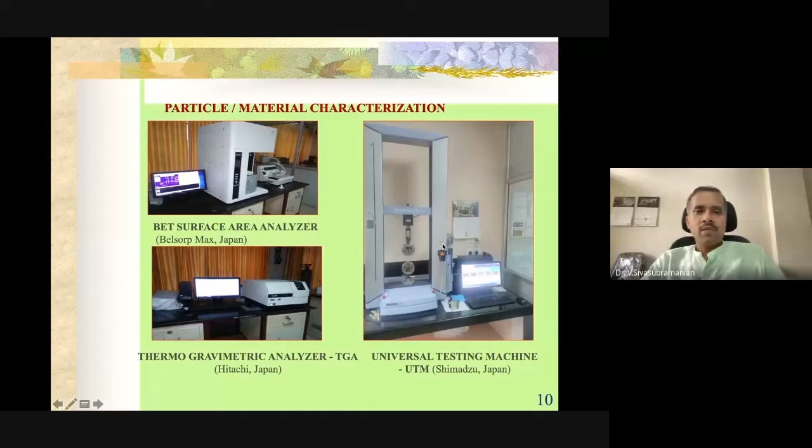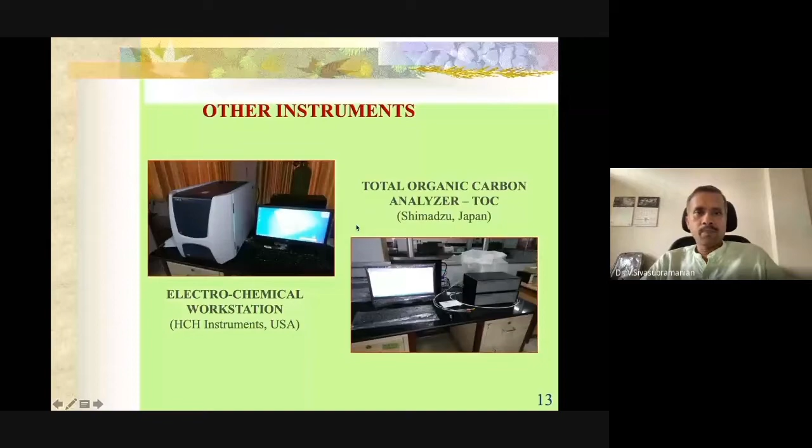We have a BET surface area analyzer, TGA thermogravimetric analyzer, and universal testing machine, FTIR spectrophotometer, and UV visible spectrophotometer. This one is FTIR, gas chromatography and ion exchange chromatography. We have a total organic carbon analyzer and electrochemical workstation. We have a microscope camera, refrigeration centrifuge, and probe ultrasonicator.

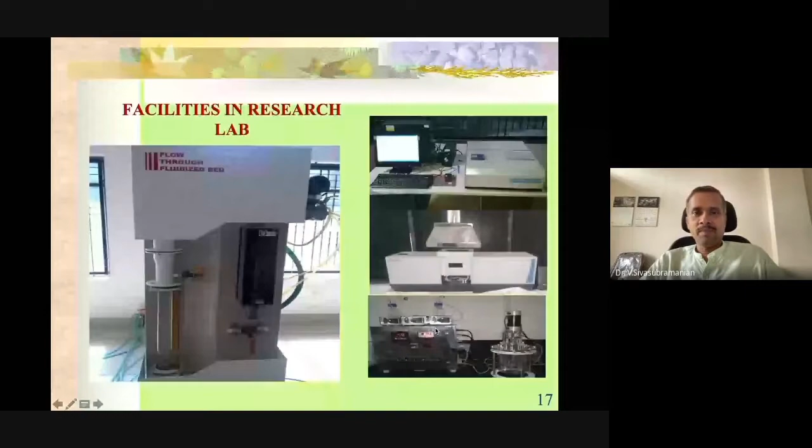And these are some of the undergraduate laboratories. Some other facilities include a fluidized bed reactor. We have totally 2 UV spectrophotometers, atomic absorption spectroscopy, and one fermenter. These are other UG lab facilities.

We purchased one biodiesel plant at a cost of 7.5 lakh. One of my students prepared biodiesel from rubber seed oil using this plant, which has a capacity of 75 liters. She used this pilot plant for her final studies because it consumes more chemicals.

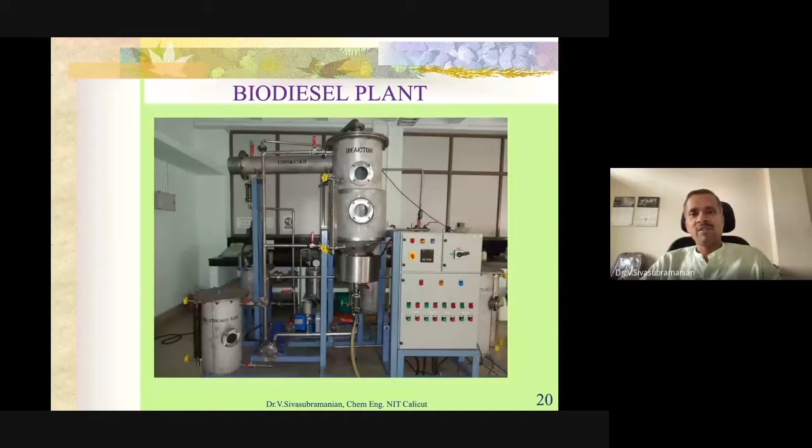Let us come to the topic. Let me first introduce fluidization. What is fluidization? What is inverse fluidization? Then we'll go for the research.

Gas and liquids are fluids; they can flow easily. Whereas solids cannot flow, but we can make solids flow like liquids and gas, fluids. This phenomenon is termed as fluidization. If you have upward flow of liquid or gas, this will carry the solids also. This phenomenon is termed as fluidization. Under fluidization conditions, the solid particles have density greater than that of the liquid.

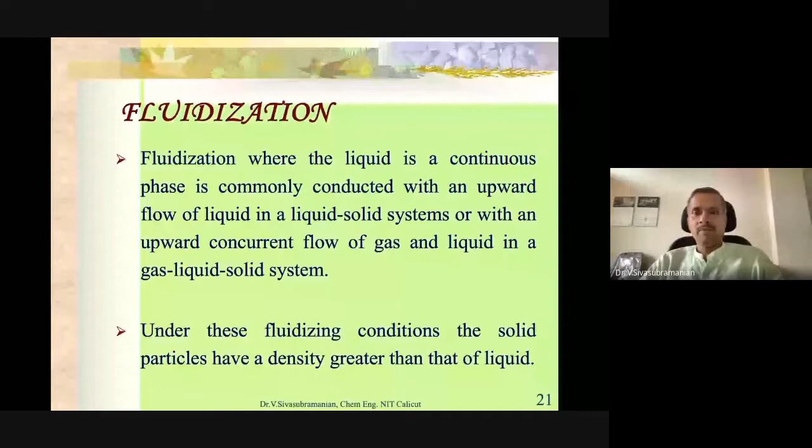Let me show the basic diagram of a fluid bed reactor. I can say this is a combination of a packed bed reactor and CSTR, mixed flow reactor. The special feature of a packed bed reactor is we can increase the residence time of the material, whereas uniform composition is a question in packed bed reactors. Whereas in a stirred tank reactor or CSTR, we get uniform composition, but residence time is an issue - once we put in all reactants, they immediately get converted into the final product. There is no slow processing, so product quality will be questionable. But in our fluidized bed reactor, we have both advantages from packed bed as well as mixed flow reactor.

In packed bed, the advantage is we can increase the residence time, and in fluidized bed reactor also we can increase the residence time. Then for CSTR's uniform composition - in CSTR we achieve this by mixing the contents, but here we are not doing any mixing, we are not using any stirrer. Mixing will still be there; even without a stirrer, the contents will be mixed.

Let us see the basic diagram for the fluidized bed reactor, particularly used for coal gasification. We have a cylindrical tank, and gas will be introduced from the bottom through a sparger. Above the sparger, you can keep the coal particles, and you can make the solids flow too. There will be one constant solid inlet and solid outlet, so it will be a continuous process.

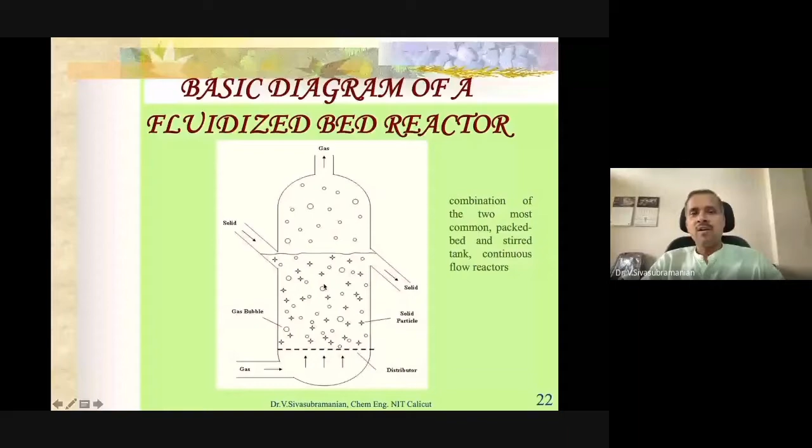So at a certain velocity only, the particles will start to flow. This is termed the minimum fluidization velocity, and after that velocity the reactor is called a fluidized bed reactor. The phenomenon is called fluidization. Initially, this reactor was developed for coal gasification or coal combustion.

Let us compare the fluidized bed reactor with the fixed bed reactor. In a fixed bed reactor, you have full packing. So if I place two objects with different densities, since the packing is full, even with liquid or gas flow, both objects will remain at the top only.

Whereas in a fluidized bed, at the fluidized condition, the solids are suspended, and since it's not 100% packing, the fluid covers the complete volume of the column. So if I put two objects, the one with higher density will sink, and the one with lower density will float.

If I measure the pressure drop in a packed bed, I cannot relate it to the height or weight of the solids. Whereas for a fluidized bed, if I measure the pressure drop, I can link it to the height or weight of the solids—it is proportional to the height or weight of the solids.

In a packed bed, filling and removal of solids is hectic, and removal has to be done manually. Whereas here, filling will be manual, but removal is quite easy.

You can give the fluid flow, maybe liquid or gas, and at increased flows the solids will rise. We have one outlet, which we can keep in the middle or slightly lower, so all particles can be collected along with the liquid easily.

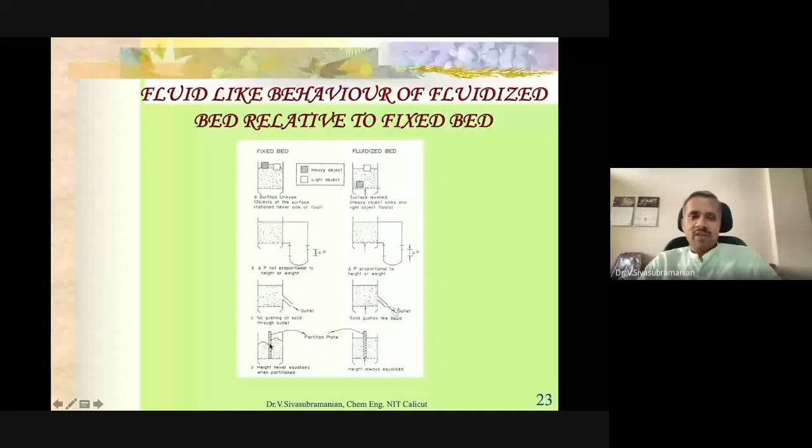One more difference: if I put a partition inside the packed bed, the levels won't be equal because the particles have 100% packing—even with liquid present, the levels cannot be equal. But here, in the fluidized bed, the levels will be equal.

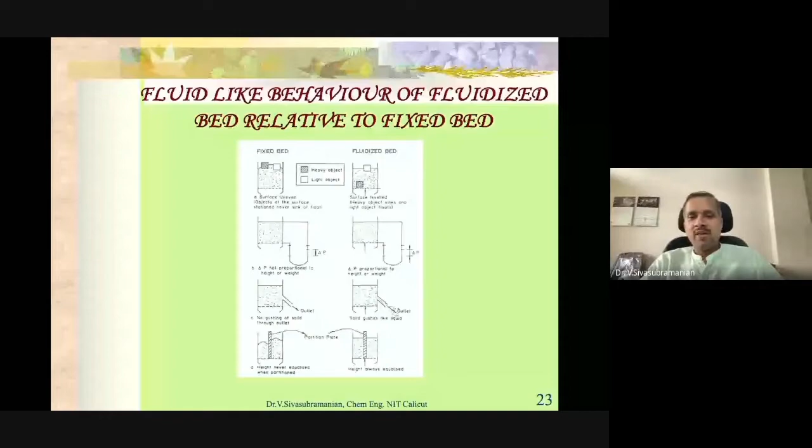So these are the differences. Now let's move to the advantages. Fluidized bed reactors minimize the risk of blockage, provide good solid mixing, lower pressure drop, and high heat and mass transfer rates. We can also connect a series of reactors and do circulations.

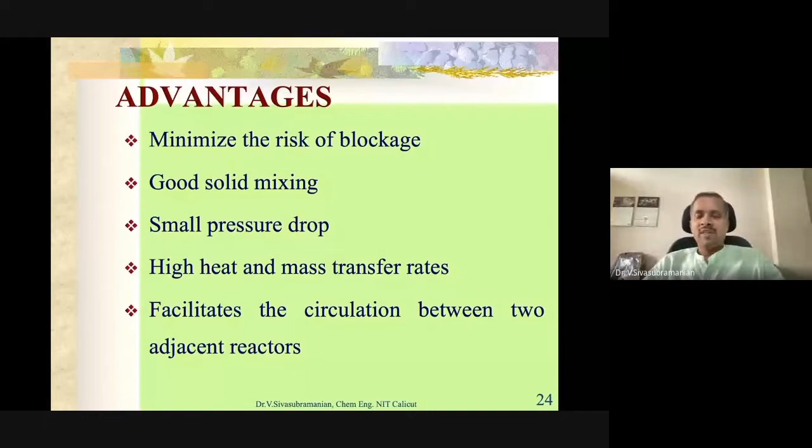One reactor can be kept adjacent to another—we can keep a number of reactors, and whatever comes out of the first reactor can be taken to the second reactor.

There are no moving parts, whereas in a CSTR we have a stirrer. Here there is no moving part, so maintenance cost is less. Also, the reactor is vertical, so we can save on land cost—horizontal giant reactors need more land, whereas this one is vertical.

It is a continuous process—we get continuous output and can plan more capacity. There's no need for a skilled operator; anyone can be trained to operate the equipment. It's also suitable for heat-sensitive, exothermic, or endothermic reactions.

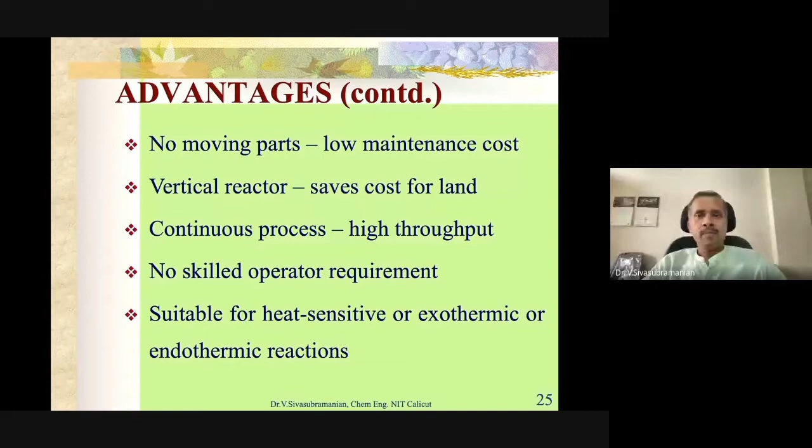It is easy to control even for large scale production. We can introduce low surface area heat exchangers inside the bed and transfer heat by passing a medium through the heat exchanger, which transfers the heat that can be utilized outside.

It is also possible to do multi-stage operations, meaning the same reactor can be divided into compartments—3 or 4 compartments. In different compartments, you can keep different solids, maybe of different sizes, and conduct the reaction or water treatment.

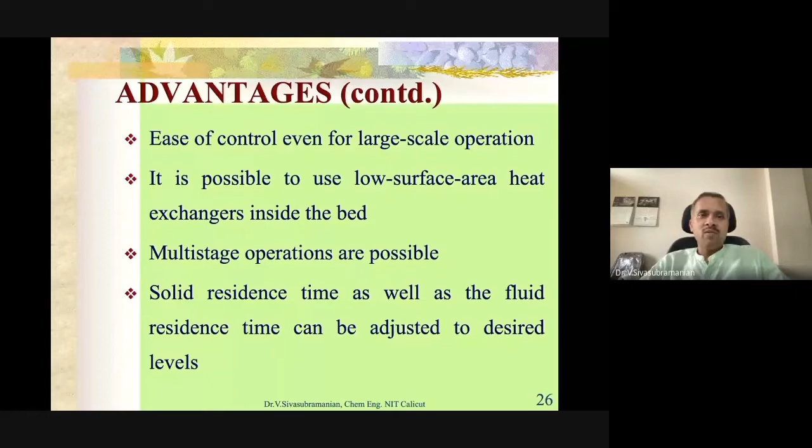Solid residence time as well as fluid residence time can be adjusted. There will be a solid inlet and outlet, and the solid inlet can be adjusted. Liquid flow as well as gas flow can also be easily controlled.

Coming to the disadvantages, we need some special techniques for handling fine-sized particles. Fine-sized particles agglomerate and settle easily, so they are very difficult to handle. There is also increased reactor vessel size, since the height is higher, so it may need some infrastructure cost. And hydrodynamics features are complex, so modeling and scale up are difficult.

And elutriation of fines. Sometimes the fines may escape the mesh at the top and bottom, because we keep only a certain mesh size. Sometimes during the reaction or water treatment, we get fine size particles that may escape. And we need some power consumption for pumping.

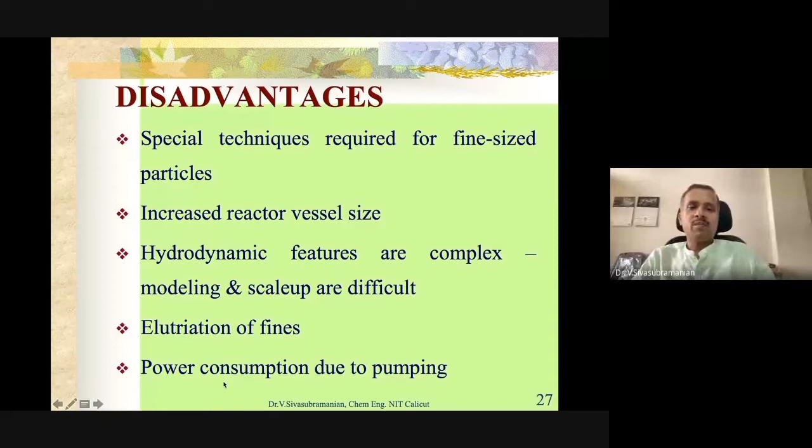Sticky materials will defluidize the bed. If the material is sticky, then fluidization won't occur; it will form a sludge at the bottom. There are limitations on the operating velocity regime, and even the choice of particle size range is limited. You cannot go for bigger sizes, and also you cannot choose the sub-fines. And highly skilled professionals are needed for design and scale up.

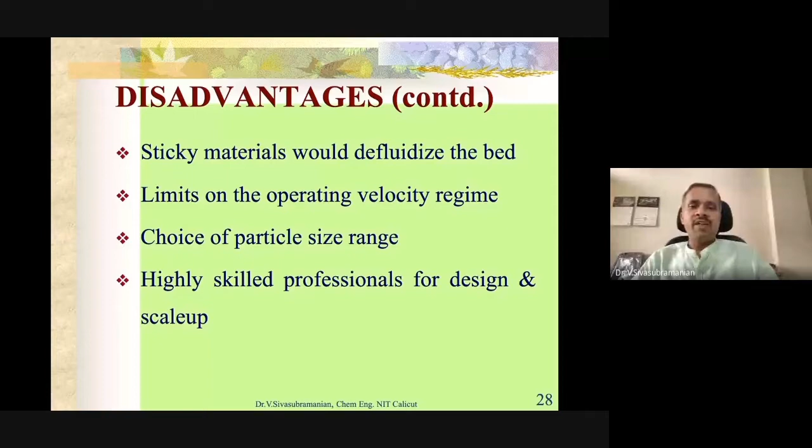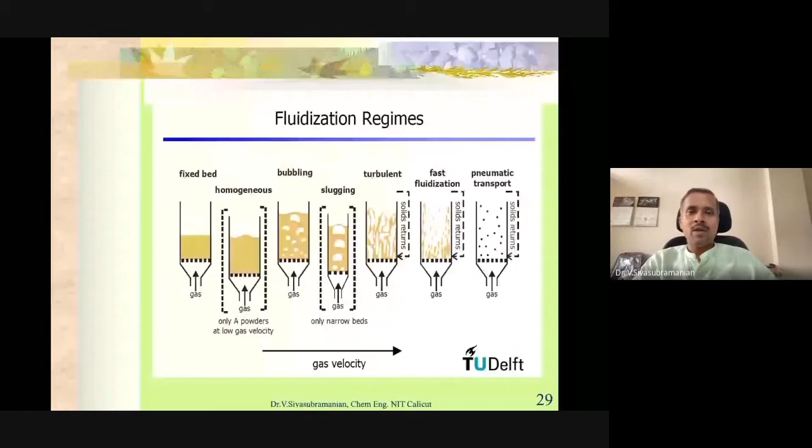Then what happens is, at one particular velocity, the top layer will be disturbed, the top particles will be disturbed. Still, if I increase the velocity, the particles will try to move. So now this is said as onset of fluidization, or fluidization starts. If you find variation in the bed height, that is the particular velocity. You have to note the velocity at which the bed height changes; that velocity is termed the minimum fluidization velocity, and we can say fluidization occurs, or this is the fluidization phenomenon.

So still I increase the velocity based on the particle size. Sometimes bubbling may occur along with the minimum fluidization velocity, or after it. So if I still increase the velocity, bubbling will occur, meaning bubbles will be formed inside the bed, and also above the bed the bubbles will be released. This is termed as bubbling.

Still, if I increase the velocity, what happens is the bubble size will meet, or become equal to, the column diameter. That is termed as slugging; slugs will be formed, so the velocity is called the slugging velocity.

If I still increase further, I may observe turbulent flow of the gas, so the particles will be in suspended form, ready to go out, ready to be transferred. If I still increase, it is called fast fluidization. Once the particles reach terminal velocity, then particles can be taken out. If there is no mesh at the top, the particles can be taken out, or it can be recycled back.

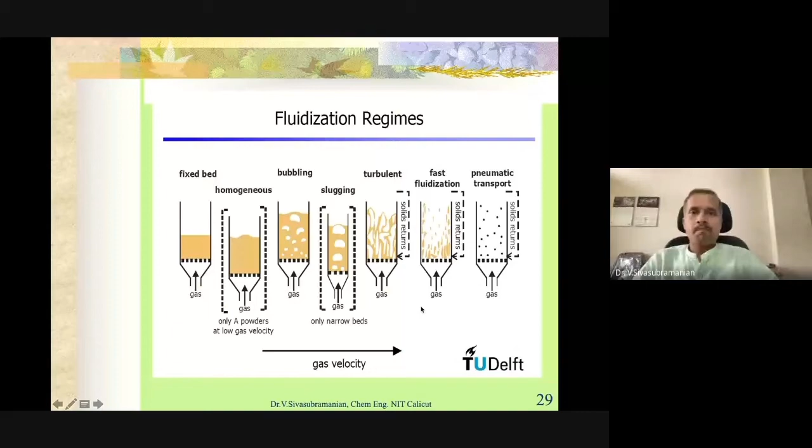So this figure, from this figure, you can observe the difference between liquid-solid fluidized bed and gas-solid fluidized bed. As I said, liquid-solid fluidized bed will be smooth. You can observe only two things: initially it will be packed bed, and as the operating velocity is greater than minimum fluidization velocity and less than terminal velocity, then it will be fluidized bed and it will be smooth. Liquid will be full, whereas particles above the minimum fluidization velocity will be suspended or fluidized. In fluidized, don't use suspended for your understanding.

I'm telling it is fluidized. Okay, then still, if you increase, once the operating velocity reaches terminal velocity, these particles will be transferred.

If you see gas fluidized bed velocity: first is the operating velocity above minimum bubbling velocity. Second case, it is above minimum slugging velocity, less than transport velocity. And this one is greater than transport velocity and less than UMD, that is transition velocity. The phase is transition. Above transport velocity is transition.

Then terminal velocity. Once it reaches transition velocity, for the turbulence - then this one is above terminal velocity, the particles can be transferable.

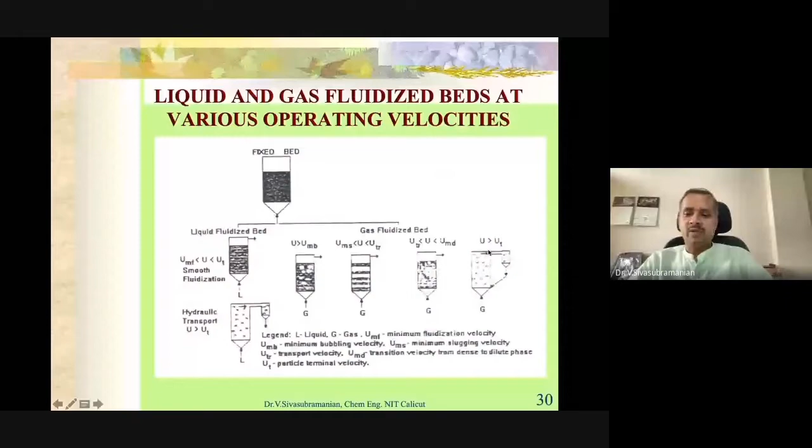So far I said we can use liquid or gas, so it will be liquid-solid or gas-solid. And all three phases I can use, then it is called gas-liquid-solid, three-phase fluidized bed reactor. So if you can observe the different regimes, how the bed is during the operation of three-phase fluidized bed reactor.

It will be in the mixer form. I am introducing gas and liquid in the upward flow, particles are there. So for this I can keep gas flow rate at one particular velocity and vary the liquid flow rate. Later, if I want, I can keep the liquid flow rate at a particular velocity and vary the gas flow rate. So if liquid is fixed, I can get minimum gas fluidization velocity; if gas is fixed, I can get minimum liquid fluidization velocity.

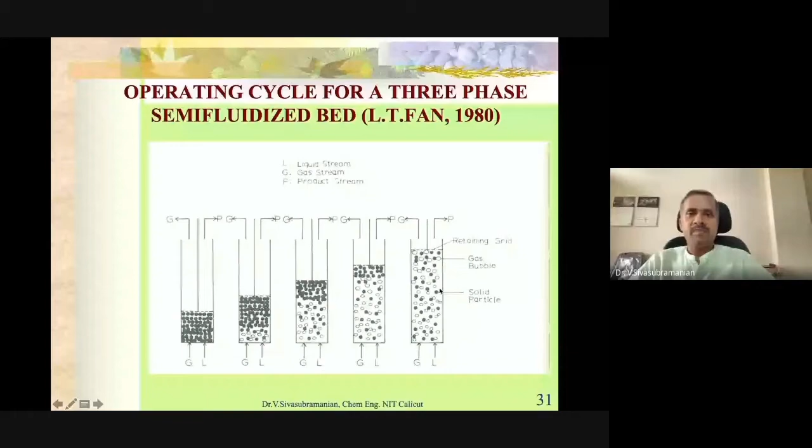So you can see how it happens - slowly the bed will increase and the particles will be detached from the bed and they will fluidize. And you can make plots from the experiments. Experimental part I will explain again.

If I make a plot of bed pressure drop versus gas velocity, then as I increase the gas velocity, the bed pressure drop increases until the bed is static or packed bed. Once the bed fluidizes, the pressure drop won't increase, it will be constant. And after reaching a certain maximum, optimum point, then it will decrease.

And if the top of the column is open, as I mentioned, then all particles will be transferred. Otherwise, if I keep it closed, then I am doing the reverse operation. Once the particles are transferred out of the column, the pressure drop will increase again.

Now I am stopping here, before reaching the terminal velocity, and I am doing the reverse operation. What happens? The trend will be the same, the path will be the same up to this fluidized condition. After that, it won't be the same - there will be a slight variation or decrease in the porosity, pressure drop. This is called the hysteresis phenomenon, and you can add some surfactant to solve this.

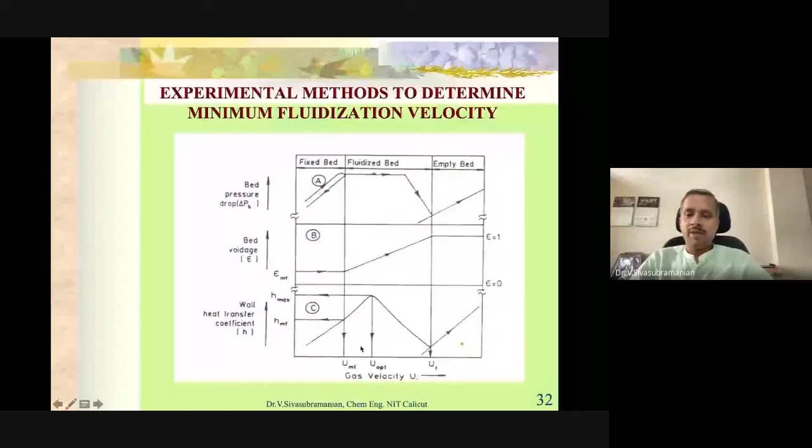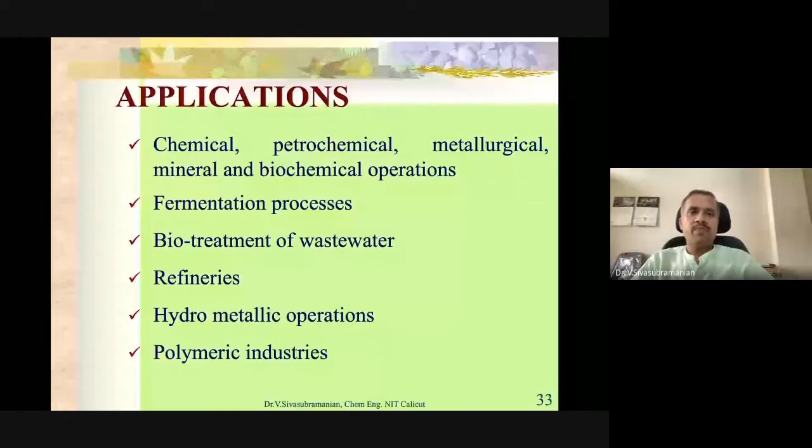Applications of fluidized bed reactors include chemical, petrochemical, metallurgical, mineral, biochemical operations, fermentation processes, biotreatment of wastewater, refineries, hydrometallurgical operations, and polymeric industries. These are typical applications, such as polyethylene production.

A comparison between suspended and immobilized fluidized bed reactors can be used for biochemical operations, bioprocesses, or water treatment. We can take a particle and attach microorganisms to it, and use this attached particle for the treatment of wastewater. We will study this in detail later.

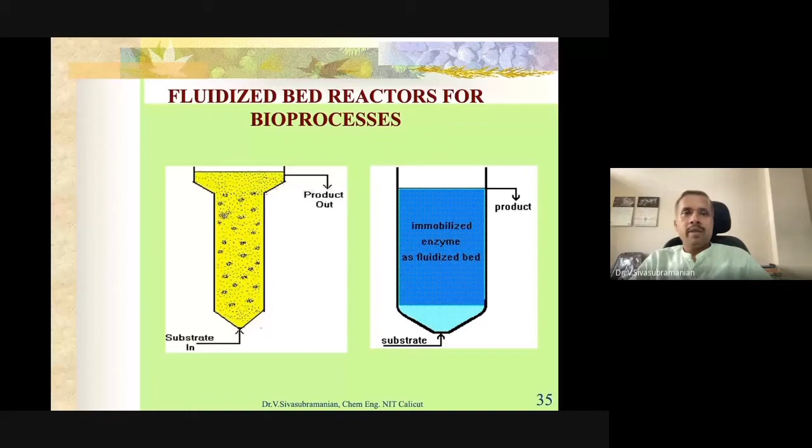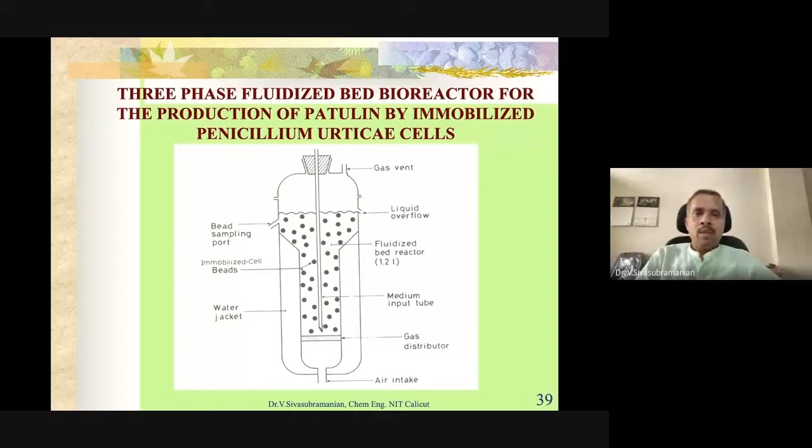Another application is ethanol fermentation. Then there's the production of patulin. Now let's look at the classification of fluidized bed reactors.

In this case, the solids, because their density is less, form a bed at the top due to buoyancy force. We introduce the liquid from the top in downward flow. Then at a particular velocity, the solids move down - that is the minimum fluidization velocity.

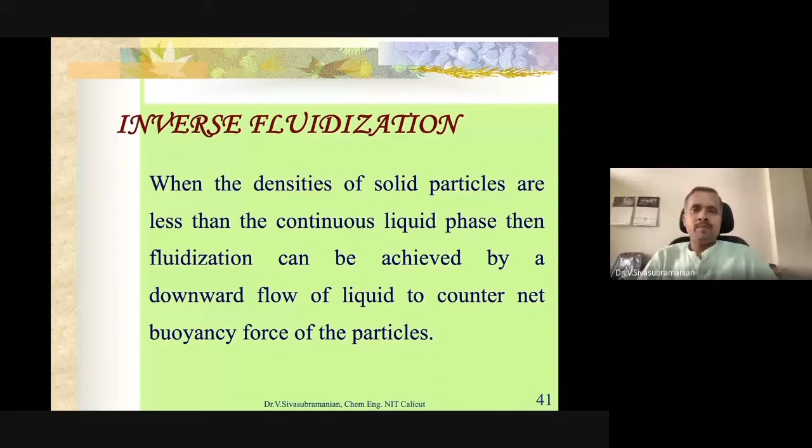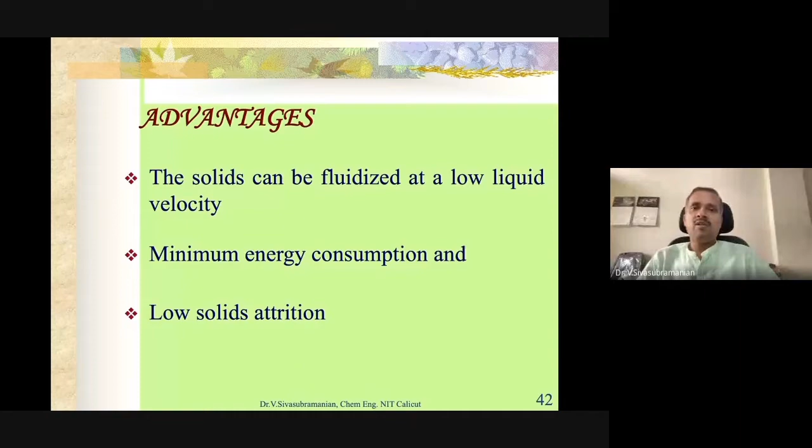Let us come to inverse fluidization. As I told earlier, the solid particles have less density, so you can achieve fluidization by introducing the liquid in downflow. The solids can be fluidized at low liquid velocity, with minimum energy consumption and low solid attrition - these are the advantages over conventional fluidized bed reactors. We can use this for biochemical, food, and environmental processes - a very efficient system for the biological treatment of wastewater.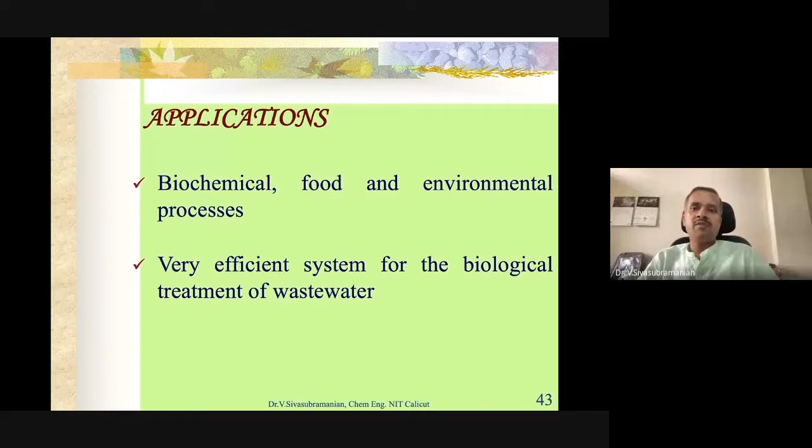If you observe the liquid-solid two-phase inverse fluidized bed reactor, initially it will be in the packed condition, then the particles try to move with the liquid but can't move fully - they settle again, move and settle again. That is termed the semi-fluidized bed, which is the onset of fluidization.

Then partial fluidization occurs - the particles move and the bed height increases to a certain level, 50, 60, 70 percent, and so on. That is the semi-fluidized bed. Fully fluidized bed means the column is occupied by the complete particles, all in suspended or fluidized form, so the total column will be a mixture of liquid, solid, and gas.

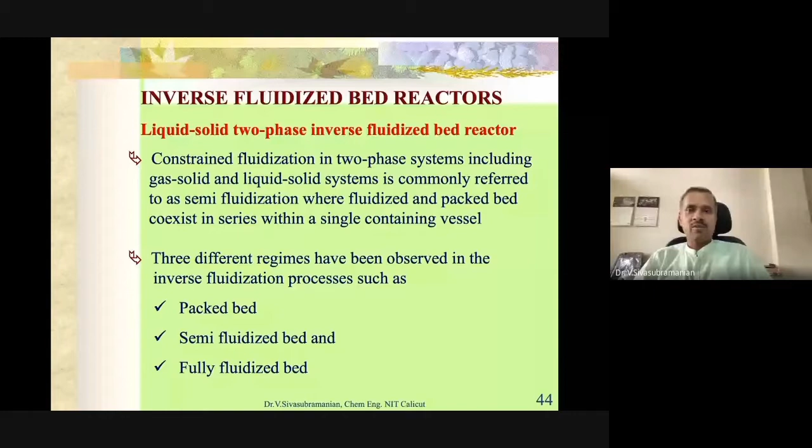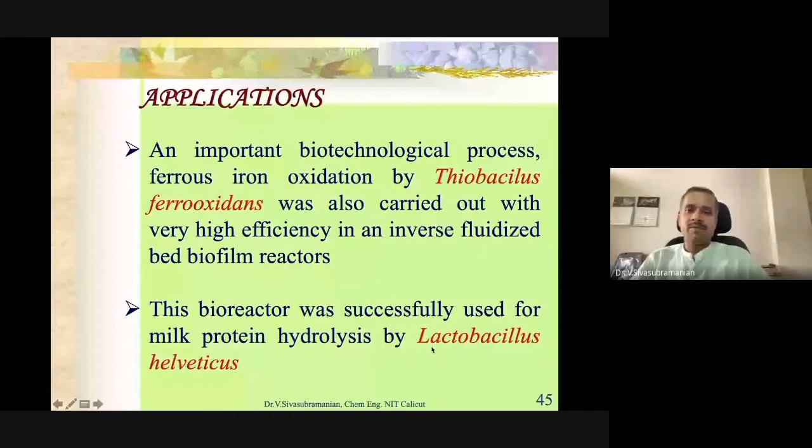If it is two-phase, it's liquid and solid, or gas and solid. This inverse fluidized bed reactor is also a very efficient system, and can be used for ferrous iron oxidation using Thiobacillus ferrooxidans, and was successfully used for hydrolysis of milk protein using Lactobacillus helveticus.

Now, fluidized bed reactors with non-Newtonian liquids. It has more advantage if you use non-Newtonian fluids for water treatment or other processes - it will be identical to non-Newtonian fluid handling, so it has wide applications.

We are going to study that also: applications in ceramic engineering, filtration of polymer solutions and slurries, flow through ion exchange beds, groundwater hydrology, petroleum reservoir engineering, polymer processing, production of microbiological mass in fermenters and activated sludge units, and extraction of metals from leached pulp.

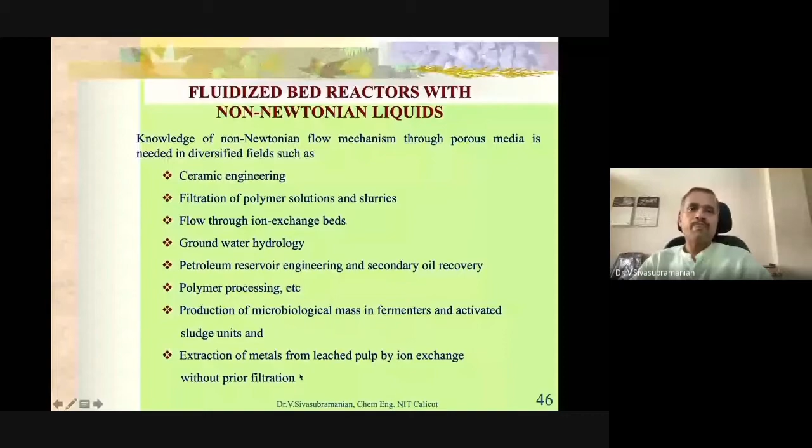So our fluidized bed and inverse fluidized bed reactors are effective devices for wastewater treatment. They have high volumetric efficiency and long-term stability. These reactors can be used for the abatement of pollutants such as phenol, nitrobenzene, and pentachlorophenol.

We know the water treatment process involves preliminary, primary, secondary, and tertiary stages. Preliminary and primary can be done with standard techniques. Under secondary treatment, suppose industries are facing a particular pollutant, then we can use fluidized or inverse fluidized bed reactors. Airlift reactors also have wide application for the specific treatment and removal of organic or inorganic pollutants.

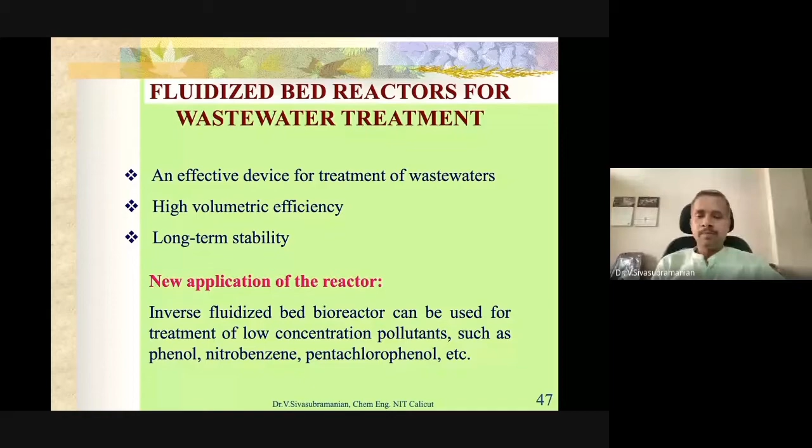Let us see the hydrodynamics: minimum fluidization velocity, porosity and hold up, then effect of additives, non-Newtonian liquids, glycerol, surfactants. First Newtonian with glycerol surfactant, then non-Newtonian with CMC, xanthan gum, and models for calculation of minimum fluidization velocity or hold up. Then RSM is used, mass transfer studies were made, and wastewater treatment was done.

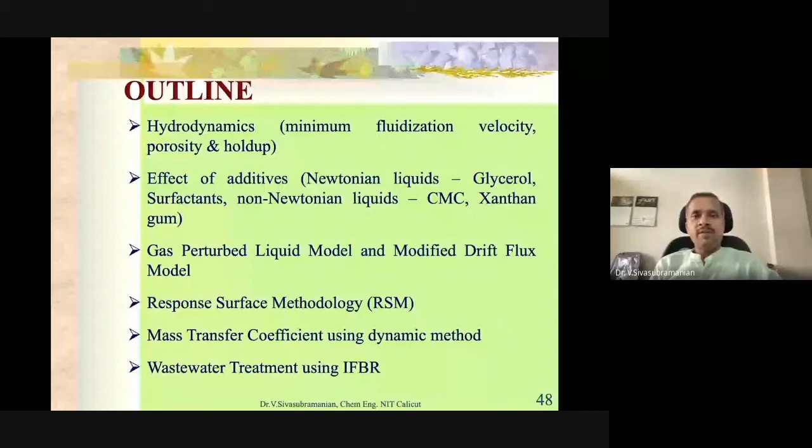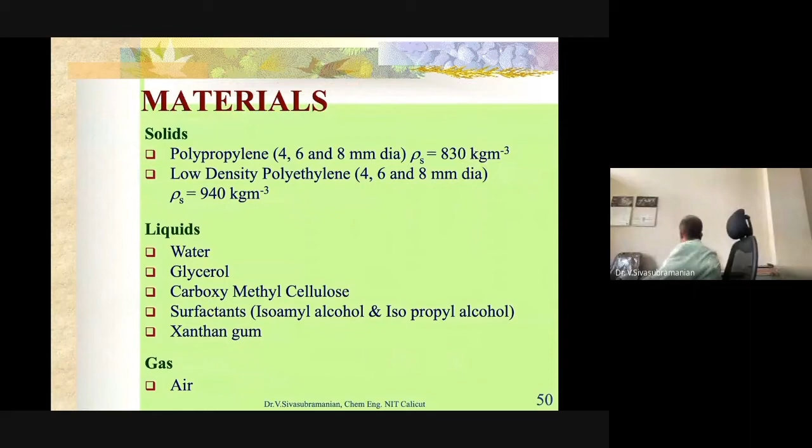Then what we have to do is start the pump and set some velocity. I am starting from zero, initially there is no velocity. I noted the bed height and pressure drop also. Then I have to set at some lower velocity, observe the bed height and pressure drop, and slowly increase the velocity. At one particular point, the bed height will change.

Up to this, the packed bed pressure drop will increase. Once fluidization starts, the pressure drop will be constant, whereas the bed height will increase. So I have to vary the velocity and observe the bed height and pressure drop, reaching the maximum velocity. I am not going for the terminal velocity because here it is closed, so maximum velocity I can operate. Then I have to do reverse operation.

Slowly I have to come back to the same set points. I have to observe the bed height and pressure drop, and I can make the plots I explained. We can calculate the bed voidage, pressure drop, and make the plots. From that I can determine the minimum fluidization velocity. Visually also I can see and note it, but it is better with the pressure drop plot.

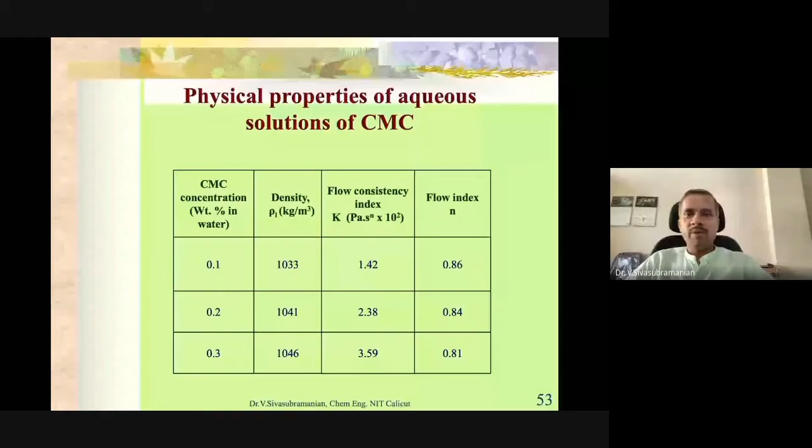For phase holdup study, let me go back to this instrument. We have taken a known quantity of solids, so we can take the solid weight. Then at a particular condition, what we have to do is simultaneously close both valves.

Then what happens is the level will come down, because whatever gas occupied at the top will be escaping, so some reduction will be there. So we have to note that height. So we know the void space, and we calculate the voidage at that particular velocity.

At that particular velocity, whatever voidage is there will be equal for liquid and gas, but we can subtract. Epsilon will be equal to epsilon s plus epsilon l plus epsilon g. So solid holdup, epsilon s, we can calculate using the quantity of solids with the different heights.

Then for gas, we note the height of the gas by simultaneously closing the two valves. That we can calculate. So solid holdup and gas holdup I can add and subtract from 1, then it will give the liquid holdup. That formula is also coming out this way.

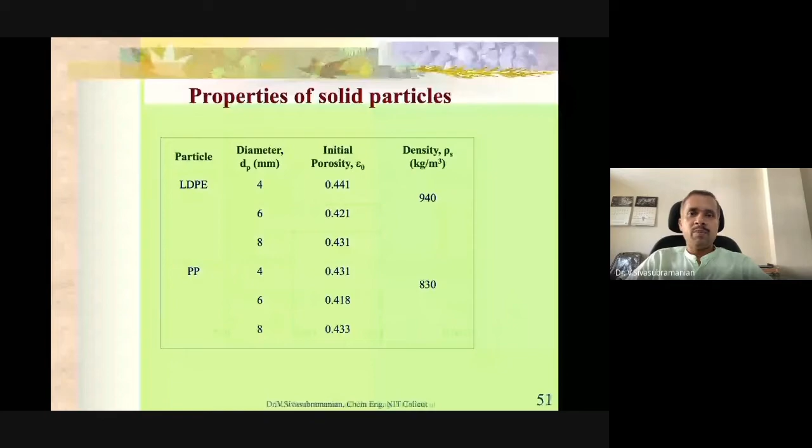If I make bed porosity versus superficial liquid velocity, it's not clear—it is not the typical ideal plot as we have seen. So what we can do is make a plot of pressure drop versus superficial liquid velocity, this is for liquid-solid system. Even if I make pressure drop versus UL, it won't be clear cut, so there will be deviations.

So what I have done, I divided the fluidized bed height at that particular velocity, del P by L, and calculated it. Initially the pressure drop will increase, then it will be constant once it reaches the fluidized condition. But instead of being constant, it fluctuates, so deviations appear. What I did was divide by the fluidized bed height, which is increasing, so del P by L will decrease. This gives a sharp point indicating the minimum fluidization velocity. So this method is better—the best method for determining the minimum fluidization velocity.

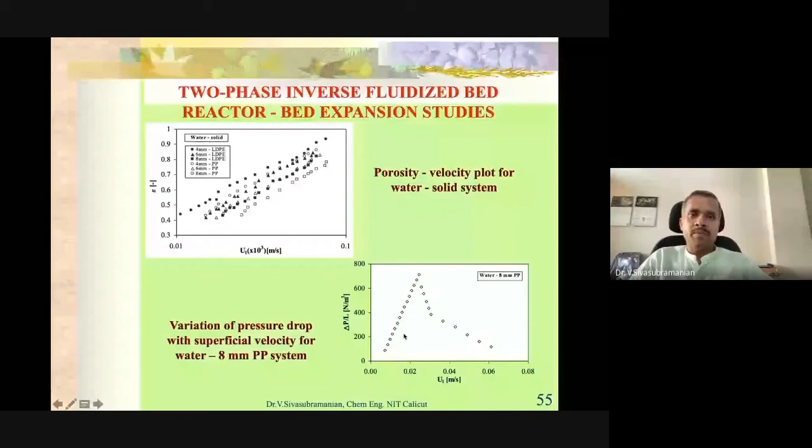As I mentioned, I can fix the liquid velocity and vary the gas velocity, or fix the gas velocity and vary the liquid velocity, so that I get this plot for the 3-phase system. Similarly, fixing liquid velocity and varying gas velocity, I can get UGMF. As I increase the glycerol concentration, the ULMF will be reducing. Similarly, if I increase CMC concentration, it is also reducing because of the viscosity.

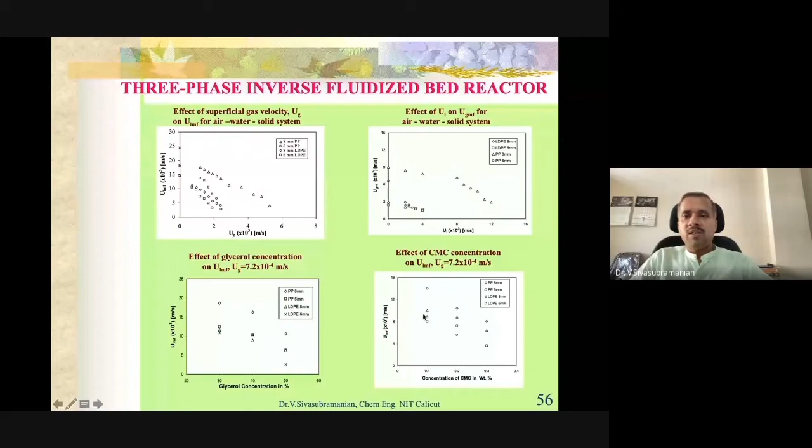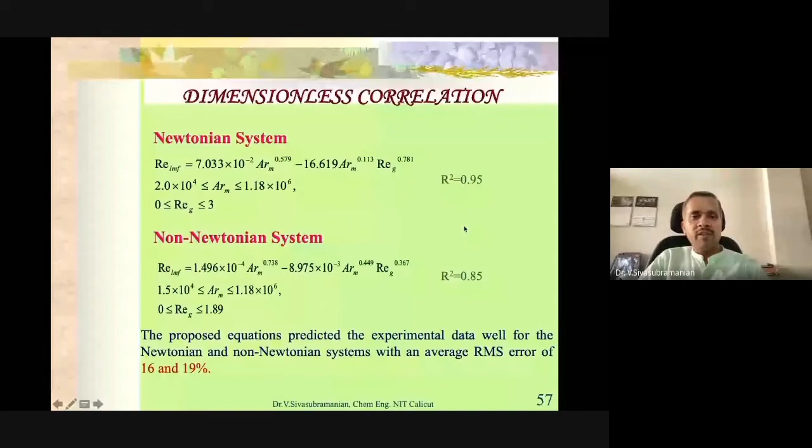So we got the dimensionless correlation for Newtonian and non-Newtonian systems in terms of ReLMF, that means Reynolds number, which includes the ULMF, superficial velocity, in terms of Archimedes number and gas phase Reynolds number. I got R square values of 0.85, 0.95, and errors of 16 and 19%.

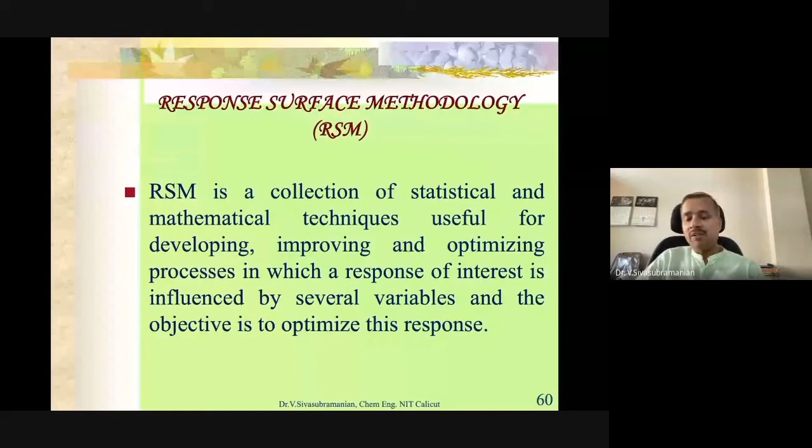Nowadays we are using response surface methodology for our bioprocesses as well as others. The advantage is we can handle the effect of several variables and observe the interactive effect. We can conduct a small number of experiments given time limitations, and observe the interaction effect of more than two variables. Normally we can handle 2 parameters, but using RSM we can handle more.

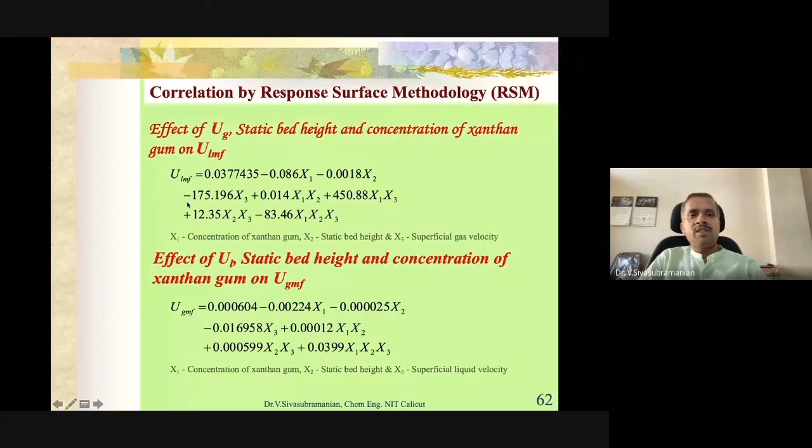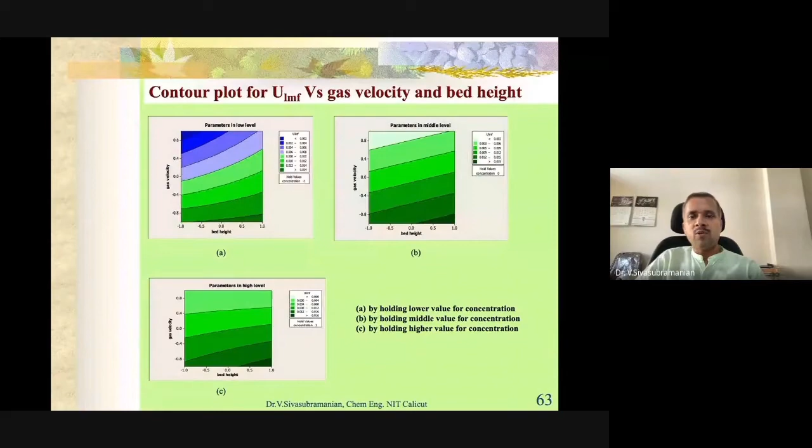So we developed correlations for ULMF and UGMF using RSM. The same observations given in the plots I explained earlier are observed using the contour plots and surface plots. Okay, coming to the hold up.

Let's see how to calculate the hold up. Solid hold up can be calculated at different bed heights using the formula, and liquid hold up has this correlation—experimental. I have not given the experimental formula here, but it is there with me, I will share if you want.

As I mentioned, we take a known quantity of solids, so we can calculate solid hold up and gas hold up from the experiment. 1 minus the solid and gas hold up gives you the liquid hold up.

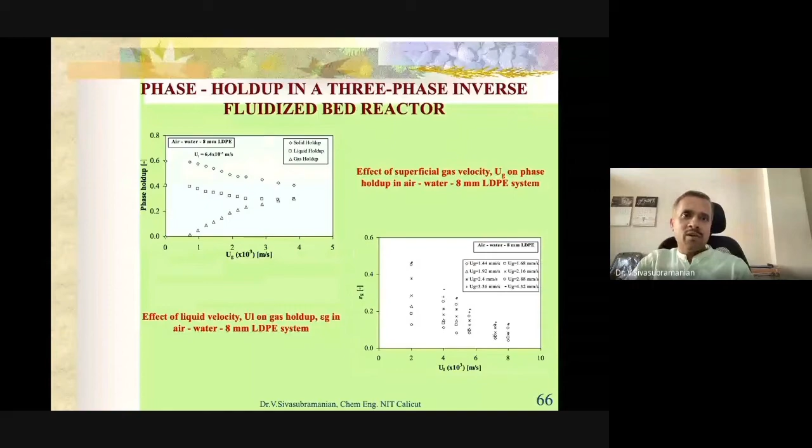I can make a plot of hold up versus gas velocity. You can observe that the solid hold up decreases continuously. Why? Even though the solid quantity is not changing, the bed height changes—initially it's a packed bed, then slowly moving to the fluidized bed, then the full column, so the solid hold up reduces. As gas velocity increases, definitely the gas hold up increases, and since gas hold up is increasing, the liquid hold up reduces. Same effect if you increase the liquid velocity—liquid hold up increases and gas hold up shows a slight reduction. This is the plot showing gas hold up versus liquid velocity.

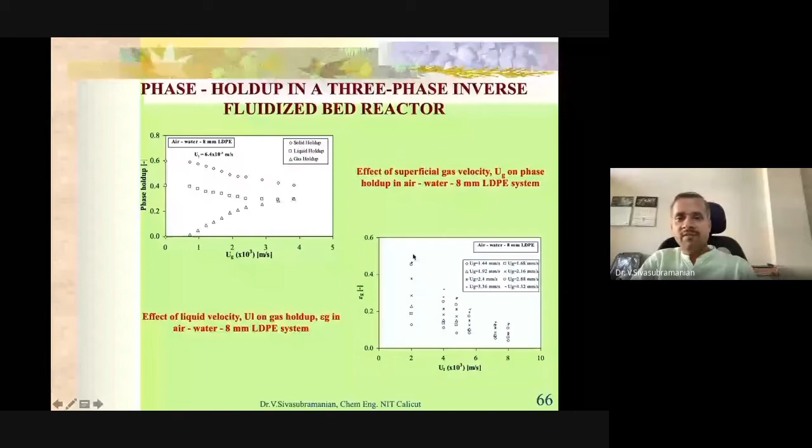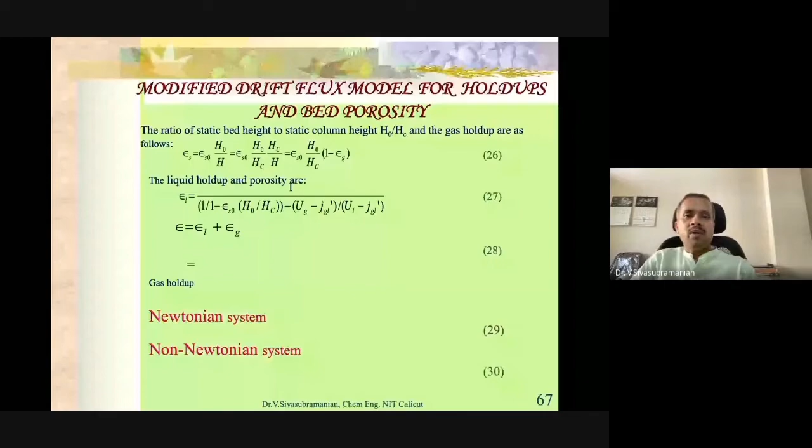As liquid superficial velocity increases, gas hold up decreases. So we used a modified drift flux model, and we obtained equations for epsilon L, epsilon S, and epsilon G.

As I mentioned, for this volumetric mass transfer coefficient, initially we have to purge the system using nitrogen to zero. Then we increase the velocity and observe the oxygen uptake rate—the meter will show the constant ppm level. You can note the concentration or oxygen uptake rate, and using that I can make the plots for this mass transfer coefficient equation. If I plot this ln value versus t, I get a straight line, and the slope of the line will be kLa, the liquid phase volumetric gas-liquid mass transfer coefficient.

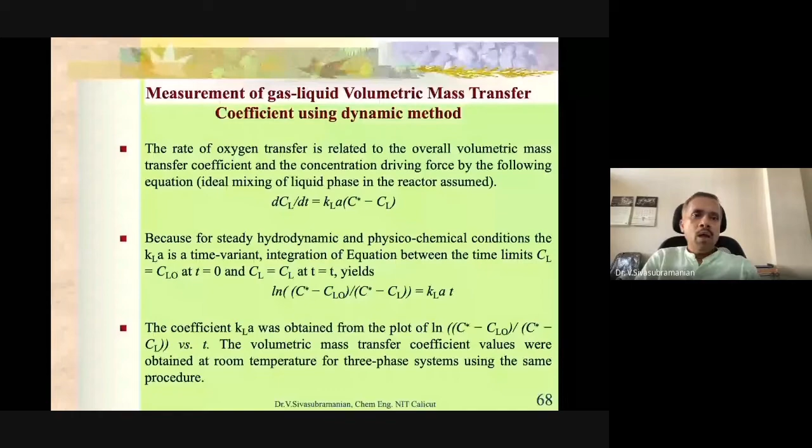I can say this is only for the trial runs using solid water gas. Whereas if I do the real biochemical wastewater treatment, in that case, my organism is the reactant, and it is going to play the role, whereas the other solid material will be the support. So what happens if I increase the bed height? There are possibilities for the increase in the mass transfer coefficient, whereas this one is not with the organism, so it is ideal solid particles.

So it is decreasing, and I have used spherical particles only. I forgot to tell, I used for my studies the spherical particles, which are ideal particles, as you know very well. And sizes 4, 6, 8 particles I have used.

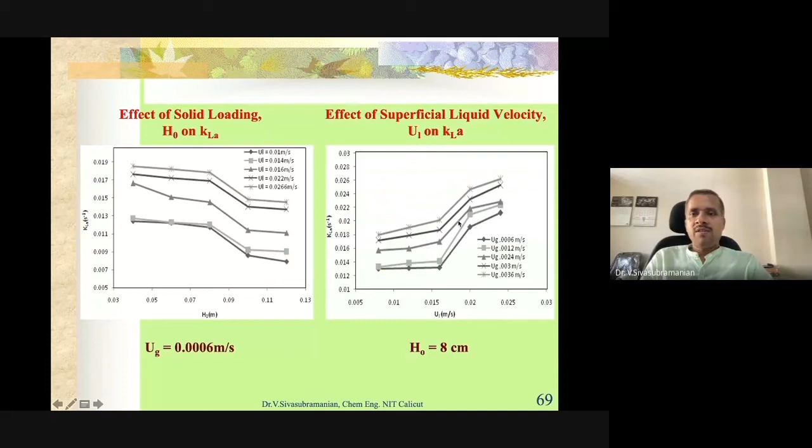Then coming to this mass transfer coefficient versus liquid velocity, if I make a plot, then as liquid velocity is increased, there will be increase in the mass transfer coefficient. Whereas if I see the gas velocity, if I increase the gas velocity, then my mass transfer coefficient will increase, and it will be very significant.

Then the last one is if I vary the concentration of the xanthan gum or glycerol, then what happens? As the concentration is increased, my mass transfer coefficient will decrease because of the rheological properties of the liquid, the viscosity. The same effects are seen in contour plots.

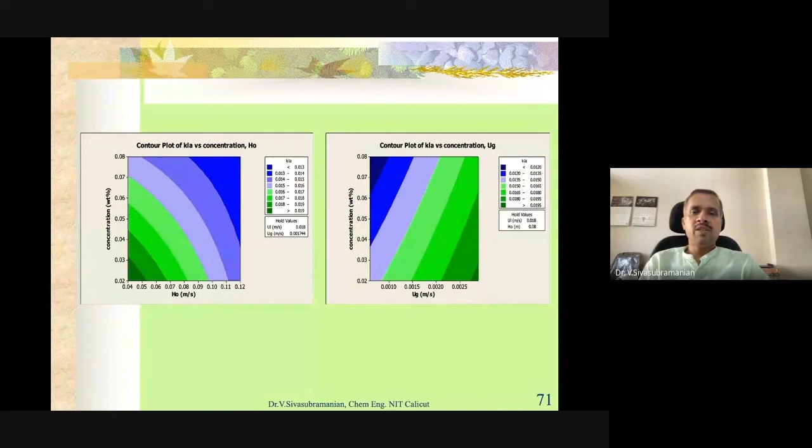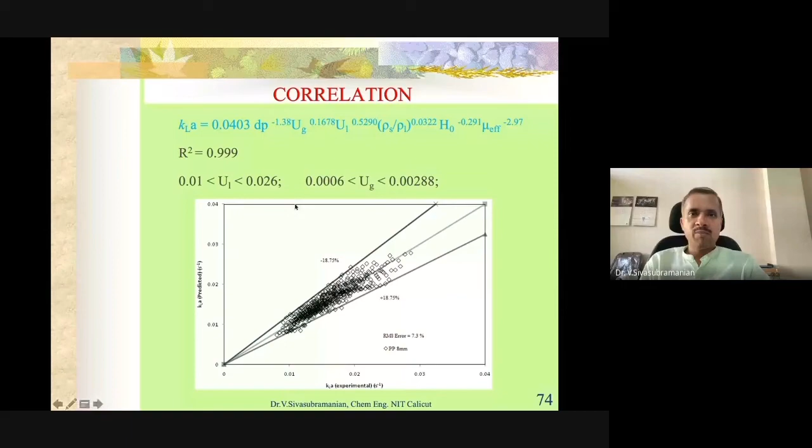Then coming to the wastewater treatment, we have to focus on this wastewater treatment. For that, we cannot use the spherical particle. We have to choose different size of particle, a different shape of the particle, so that there should be space available for the organism to grow using the solid supporting material.

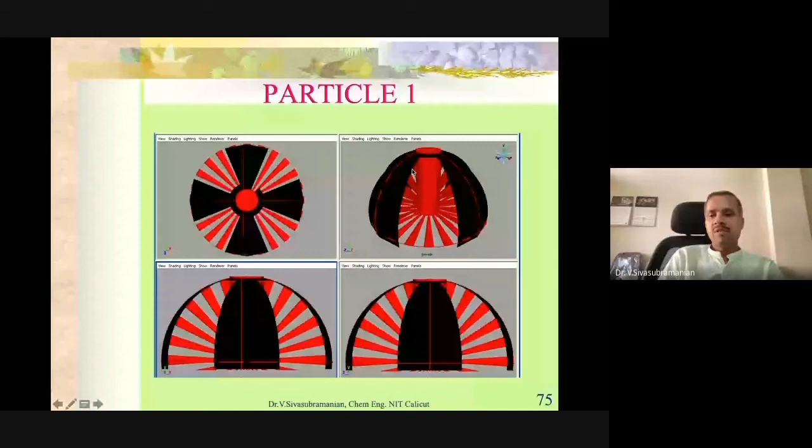So this is the one size, and this will be the another size, this one third. This only we have chosen because we got this particle, and also the available space will be good enough for the organism to grow. So initially we have to grow the organism in the particles.

For that, we have to conduct the batch study. We can take the conical flask. In that conical flask, we put up these solid particles, and that medium plus this organism. So what happens?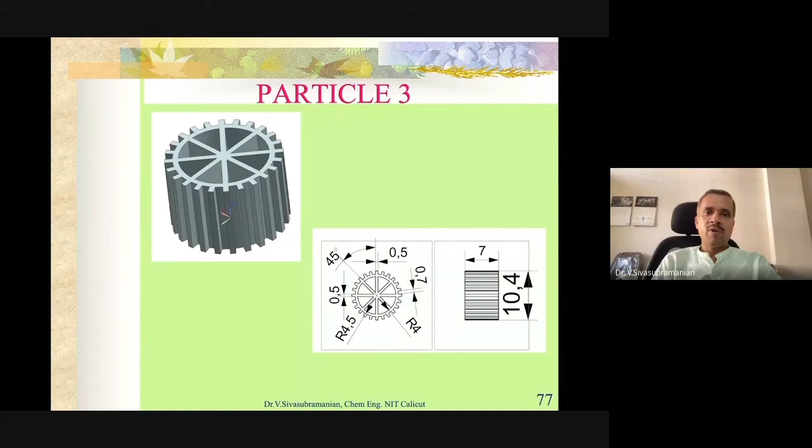This conical flask will be closed and it should be kept on rotation. So initially, the organism will pick the medium and it will grow. We can see separately organism and particles initially. Then there will be a formation of biofilm inside the particle.

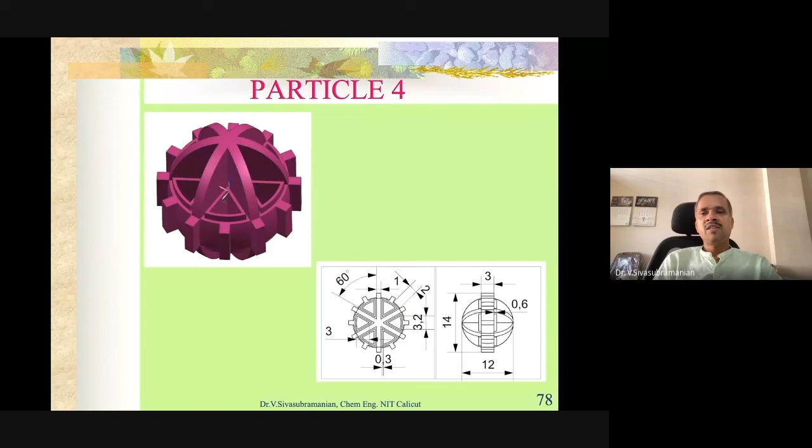This is another particle shape. Any shape we can use, whichever is having surface area more. We need more surface area. That type of particle you can use.

Coming to this, the technique is called immobilization, what I explained. You can take up the solids in a conical flask and attach the organism to the solid. So this is called biocarrier. This one is the bioparticle.

Once the organisms are in good condition, you know the organism growth curve, it will be having four stages: lag phase, log phase, stationary phase, death phase. So you can take up the particles at the end of the log phase or in between, better log phase. So you observe the growth when it is good.

You should not go to the stationary phase. So when the growth is good, you can take up and transfer the complete grown organisms with particles to the inverse fluidized bed reactor. Here we are going to conduct the wastewater treatment.

So the same column we used, and we inserted this grown organism and wastewater is introduced. Then what happens? The organisms and medium also. It may be wastewater, and initially organisms are grown using medium, so in some cases we can introduce a small quantity of medium. Otherwise, it will pick up the contaminants.

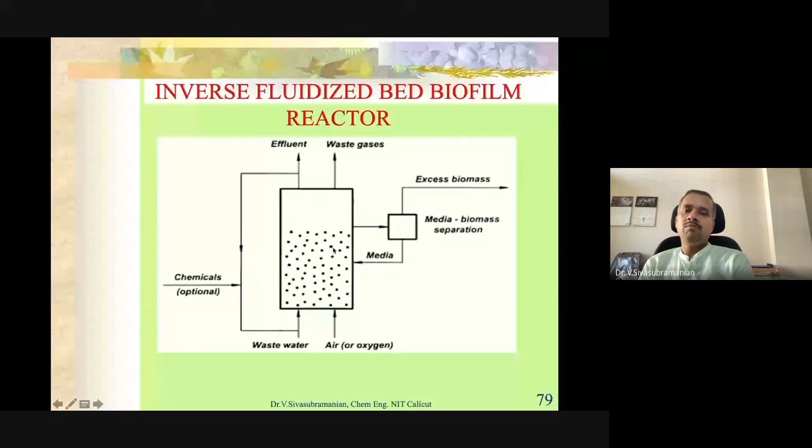That's why we have one tank. From that, continuously we have circulated. So at one point we'll reach the maximum removal of the contaminant, so my water will be some purified water, it will be of 80 to 90%. In that condition, we can stop.

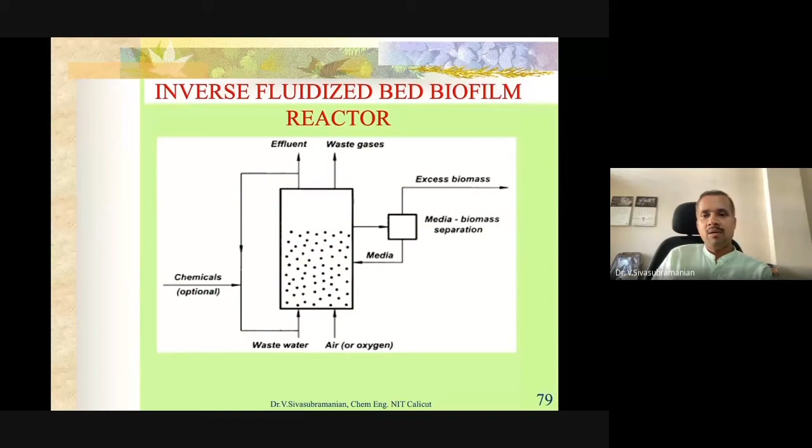So my organism may be in need of the oxygen. In that case, we have to supply oxygen also. Otherwise, it's not required. You can see how the experiments are conducted. We have to select the particle.

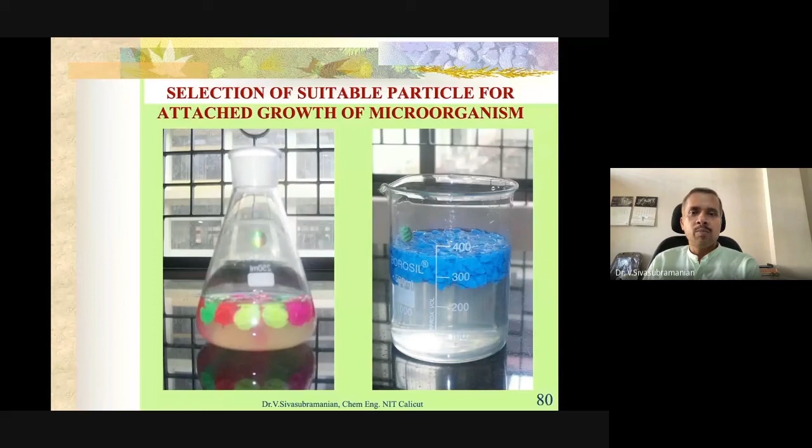So this biocarrier I mentioned - bioparticle means it is the particle on which microorganism is growing. Biofilm: after some 30-40 days, the spaces are occupied by the organism, which grows and forms a film. This is called biofilm, the layer of microorganisms. So this bioparticle and film together is called biocarrier. Here the solids are acting as supporting material.

Initially the particle spaces are clear. Later, you see the organisms well grown after 40 days. So these particles are taken for the treatment of wastewater.

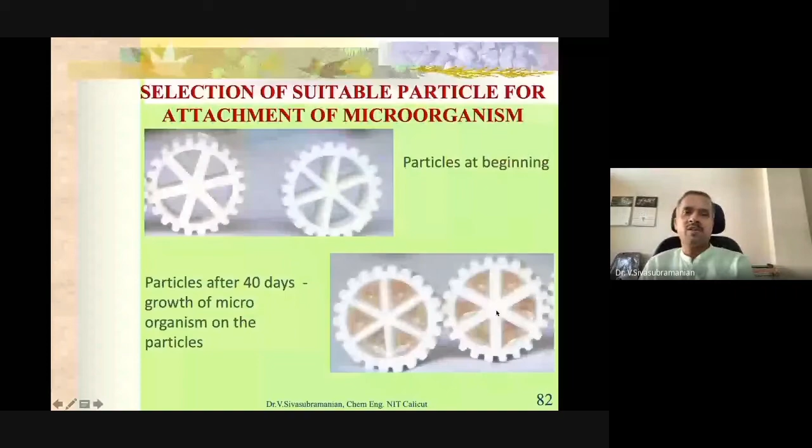So one of my research scholars did the experiment, using what I explained initially - solid particles, liquid and gas. The trial runs I did during my PhD work, and later at NIT, one of my students took domestic wastewater and treated it using an inverse fluidized bed reactor. He completed the PhD work, and initially he joined as faculty only, part-time PhD.

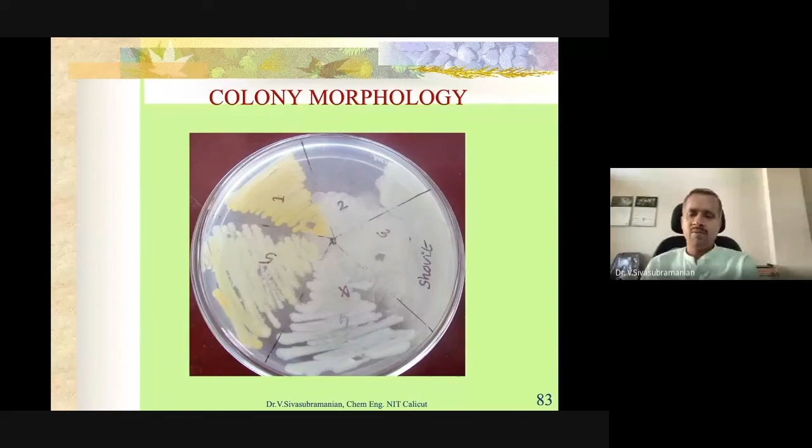pH should be 7, it will be convenient. And inoculum concentration 7.5 volume by volume will be good. Minimum duration should be 2 days for the batch studies.

So the first plot shows percentage COD reduction versus time. And if you see, pH 7 will be good, it will be optimum. There is no need to go for 8, 9, 10 because at 7 itself the percentage COD reduction is good. So we have taken chemical oxygen demand, COD, as the variable.

Then for number of days - let me check - it is 8 days. Some 8 days are sufficient for the treatment, 8 to 14 days. Beyond that, again optimum will be reached. This is for batch studies, 2 days he has done, but that will come later. And minimum inoculation concentration will be good, 7.5 will be good.

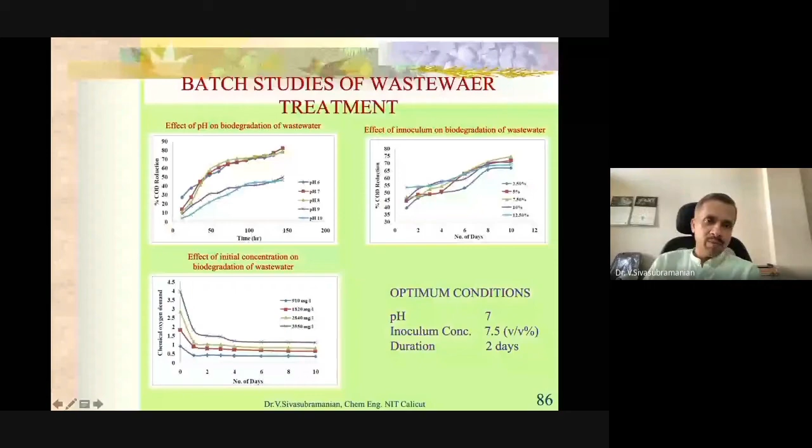And you can see the velocity also, the flow rate, milligram per liter - 3950 milligram per liter COD removal. Percentage COD reduction we have to check. That is coming next, you see here.

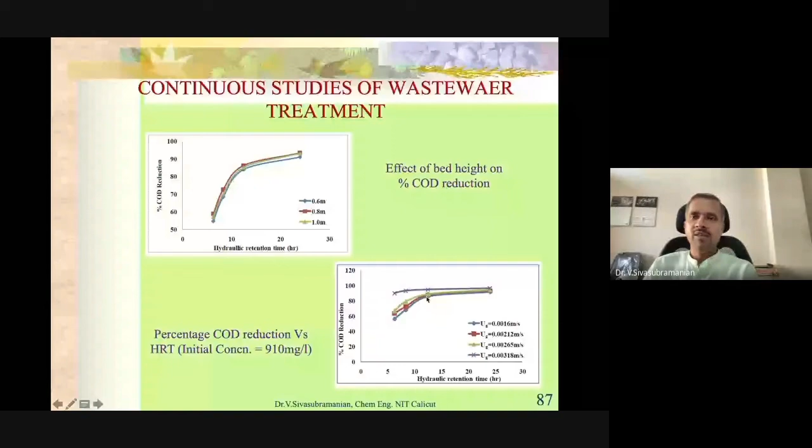And you can see this plot, effect of initial concentration on percentage COD reduction. Minimum initial concentration will be good for more efficiency. So as far as possible, we have to dilute the wastewater.

So the results obtained - initial COD was taken as 1120 milligram per liter, and hydraulic retention time 24 hours. Superficial gas velocity 0.00318 meter per second. Bed height optimum 0.8 meter. For that, percentage COD reduction we got was 81.25 percentage.

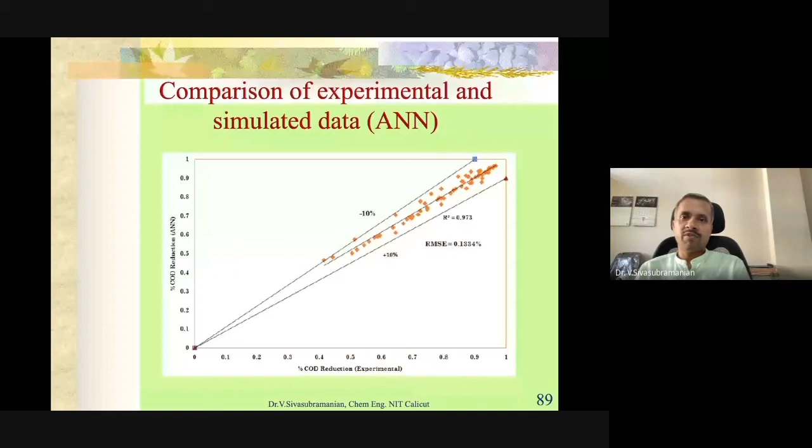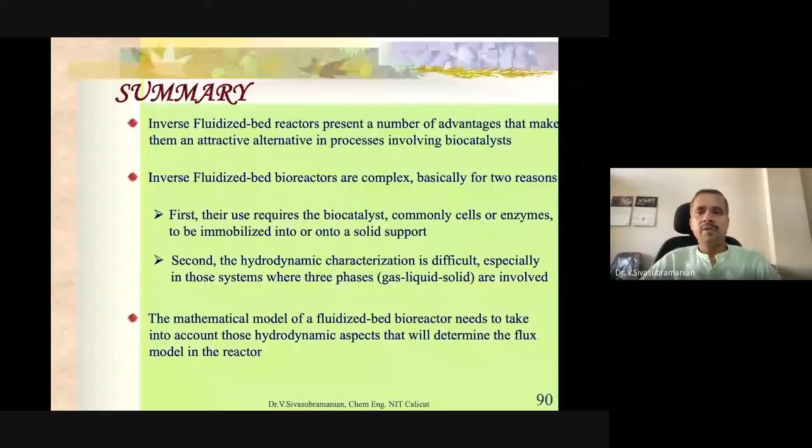So coming to the summary, I can say fluidized bed reactors as well as inverse fluidized bed reactors are excellent reactors for conducting wastewater treatment, also for biochemical processes. The only thing is the handling, design and simulation part - modeling part - will be difficult. Handling will be easy, but mathematical modeling and designing are complex aspects. So if we focus, we can use the inverse fluidized bed reactor effectively.